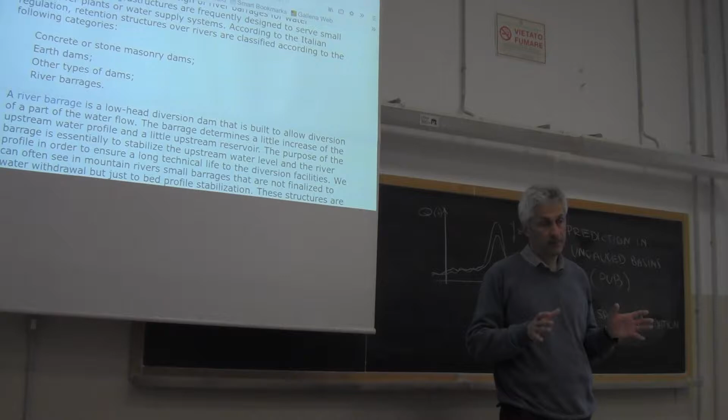Dams are conceived in order to store water when we don't need it and to release water after storing it when we need water. So the purpose of a dam is to create a large storage. The storage in river barrages is much smaller. River barrages can ensure some compensation, but not in the long term. If they can provide some compensation, it is normally limited to 24 hours when I talk about barrages.

In dams, the compensation is seasonal. Usually we accumulate water during the winter and release it during the summer. For barrages, the volume is much smaller. As a consequence, dams are more important infrastructures with respect to barrages. Barrages are smaller infrastructures. Typically, they are built over small rivers, not only, but typically over small rivers.

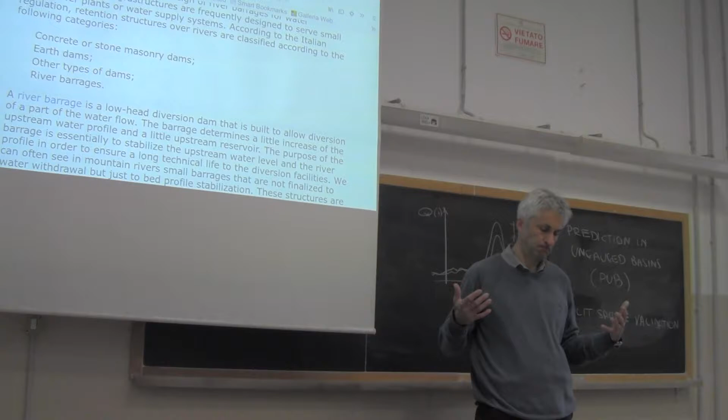Keep in mind that there are some exceptions on the purpose of barrages. Some of them may be built just for stabilizing the riverbed, not necessarily for withdrawing water. Some of them may be built for ensuring navigation, so keeping the water level at a measure that allows navigation. But the great majority of barrages are coupled with some withdrawal facilities.

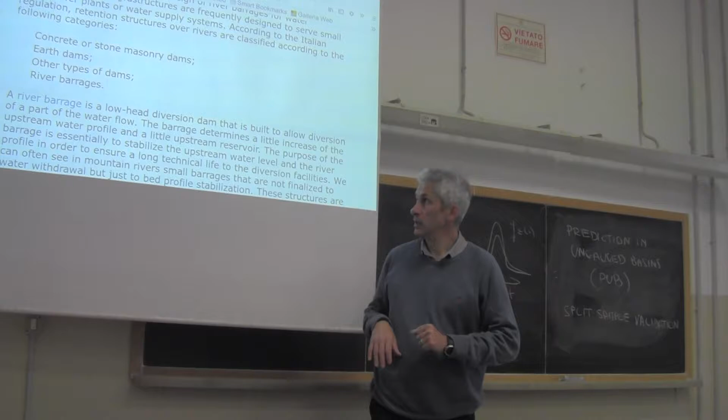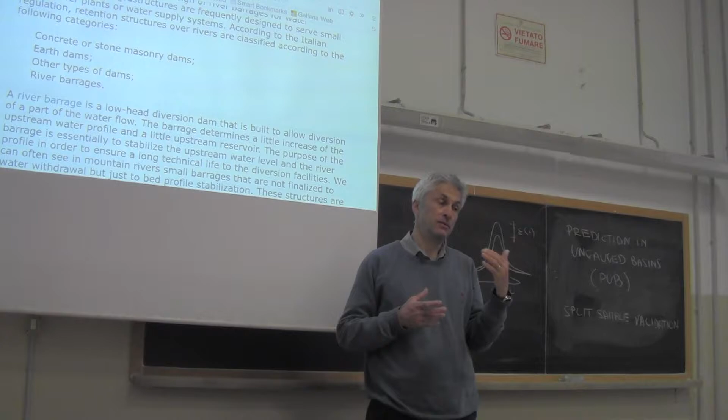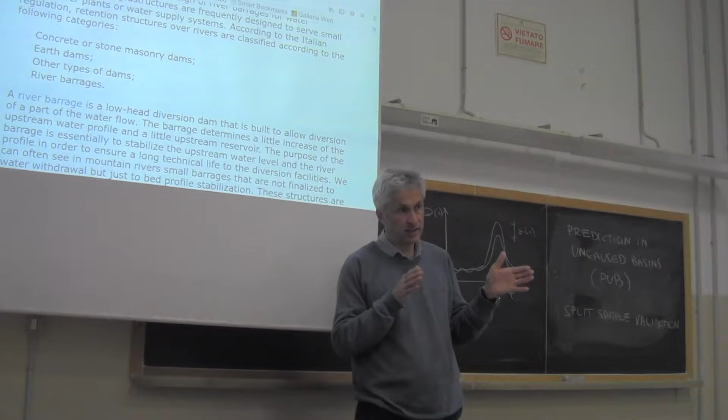Now, in order to establish by law the difference between the two, because it's extremely important for administration that we make an objective difference between barrages and dams, the Italian law in force adopts a criterion that is based on two indicators. And the first indicator is that, let me see if it's already here. No.

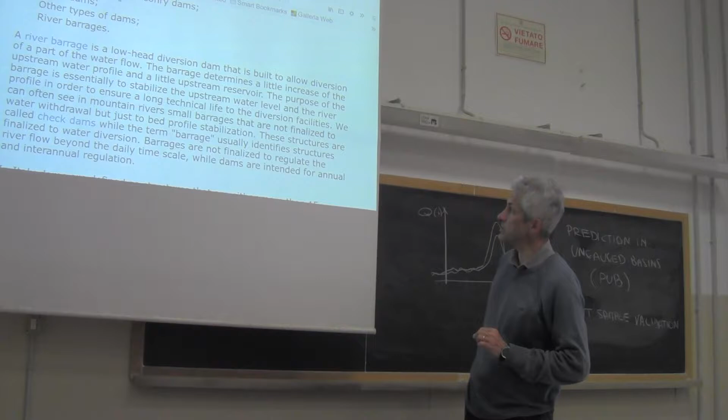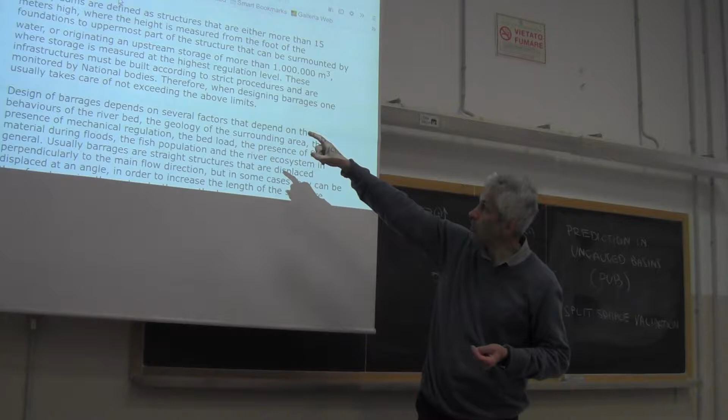In Italy, dams are defined as structures that are either more than 15 meters high, and the measure is taken to the top from the bottom of the foundations. So if a transversal structure exceeds 15 meters of height, it's a dam, or originating an upstream storage of more than 1 million cubic meters. So if one of these two conditions is met, then we are talking about a dam.

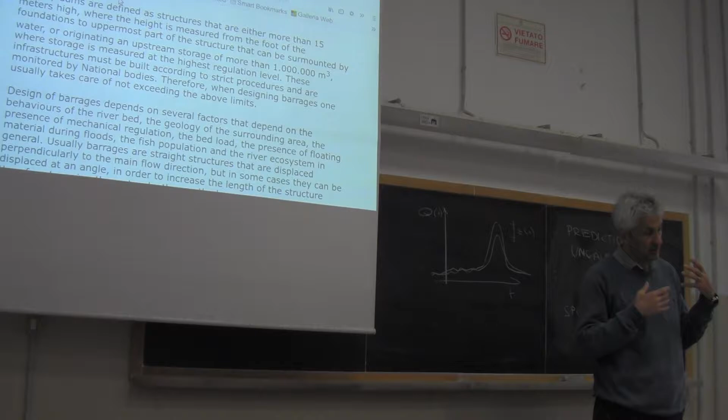And this means that the structure is under the remit of the National Authority for Dams. And the National Authority for Dams prescribes that continuous and very detailed monitoring is ensured for the structure itself. The reason is clear. If you have a structure that stores more than 1 million cubic meters of water or is taller than 15 meters, it's potentially dangerous. In case of a collapse, of course, you induce a potential danger downstream, and for this reason it needs to be monitored and surveilled with very specific regulations.

You can say that this classification is a bit strange, because if the storage is 999,999, then it's not considered to be dangerous. If it is 1 million, then it's dangerous. But still you need a threshold, you need a line of separation between structures that need to be carefully monitored and structures that need less monitoring.

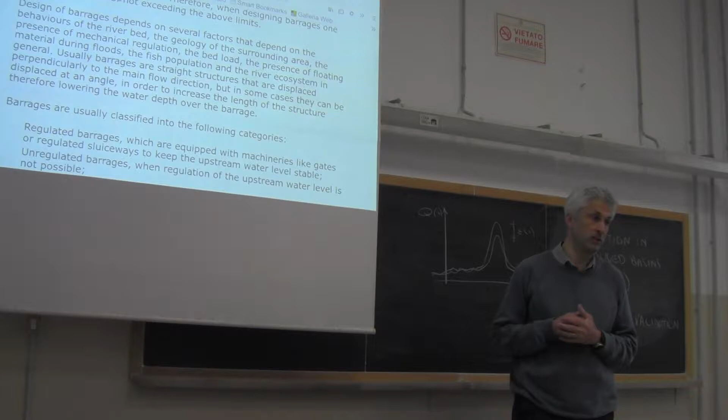So, we don't talk about dams here, we talk about barrages. What is the reason? The reason is very simple. First, dams are more complicated. They require a dedicated subject, a dedicated university course. But there is also a very practical reason.

Today, it's very, very rare, very infrequent that engineers get an opportunity to design a dam, because most of the dams that were considered to be efficient and economically convenient have already been built, especially if you work in the Western world. There are still dams under construction in the East and in Asia. They are building a lot of dams, and the reason is that in the past they couldn't have the opportunity, due to political tensions or an economic situation that didn't allow the investment of the large amount of money needed to build a dam.

Conversely, river barrages are built very frequently today, because today there is a lot of interest in renewable electricity. And the reason is clear, because we want to minimize carbon emissions. And in renewable electricity, one very interesting resource is given by small hydropower plants. And small hydropower plants can be built just by realizing a small river barrage. And this is why there are a lot of requests to professional engineers to design this type of barrage today.

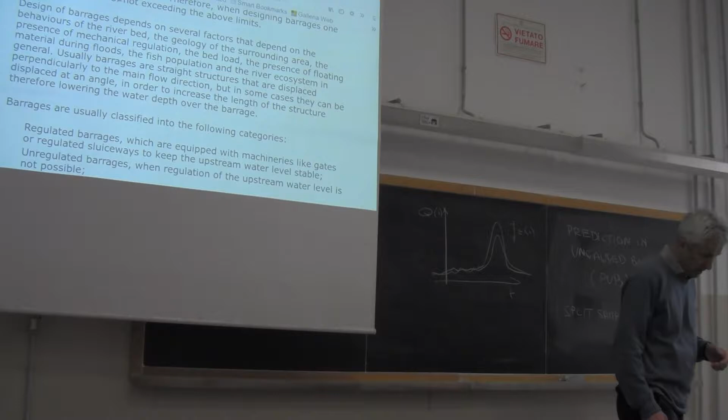Keep in mind that when we talk about barrages, I mentioned that some of them are built with the only purpose of stabilizing the riverbed. Usually in this case, we don't call them barrages, we call them check dams. If the only purpose is to fix, to stabilize the riverbed, then we talk about check dams. And we define barrages as the structures that are intended to withdraw the water.

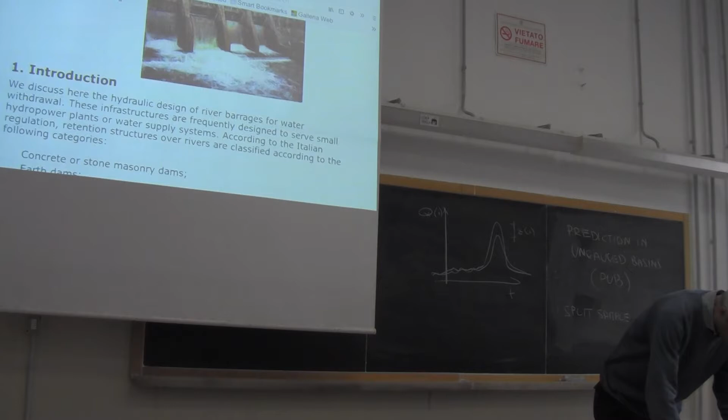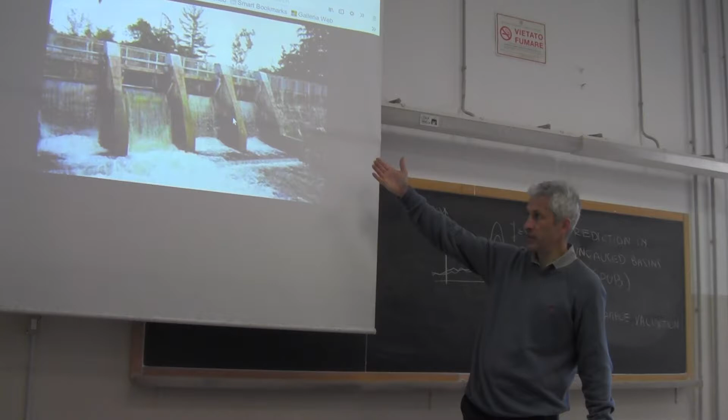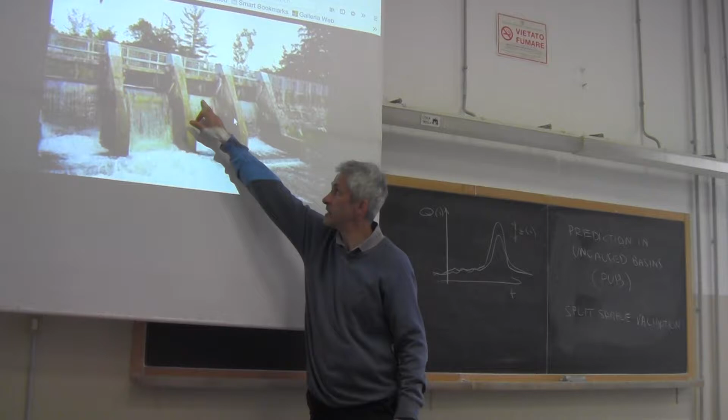I just want to give you an idea; here there is a picture. And this is a typical barrage. You see that there is a transversal structure that creates some storage upstream, and then you have water that can flow by surmounting a gate here. The gate is placed here, and this is what is called a weir. It's a threshold that, once it's exceeded by water, lets water flow downstream.

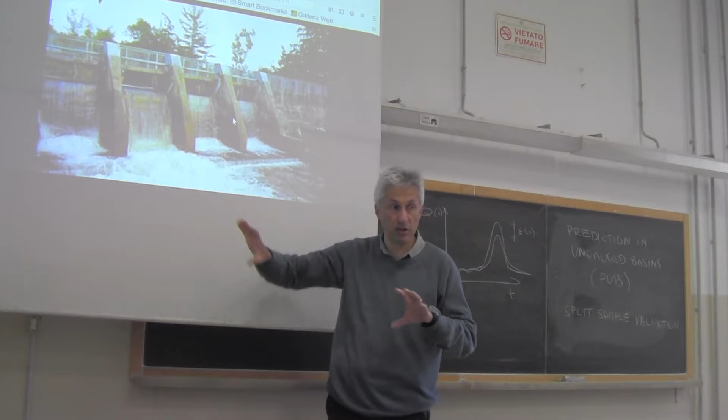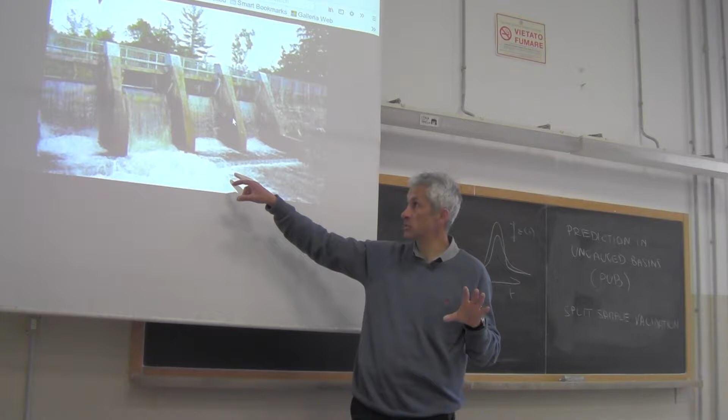And water can flow downstream also by flowing through a bottom discharge. These bottom discharges are called sluiceways. So the weirs are the apertures, let me call them, that are passed because the water level gets above a threshold. When you have a flow of water from the bottom, then it's called a sluiceway, and it can be regulated or not. In this case, it's not clear to me if it's regulated or not. If there is a gate that can move up and down, then it's regulated. If there are only windows with no gates in the bottom, they are called sluiceways.

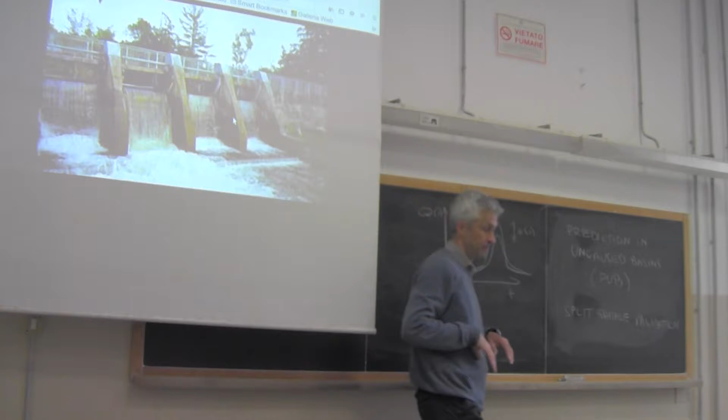And I can show you some other pictures. Let me check here. Briglia is the Italian word for a check dam. Just one second. Here is another example. This is a check dam, and you see that there is a wall with a passage of water here, and this is typically a check dam. The only purpose here is just to stabilize the level of the riverbed.

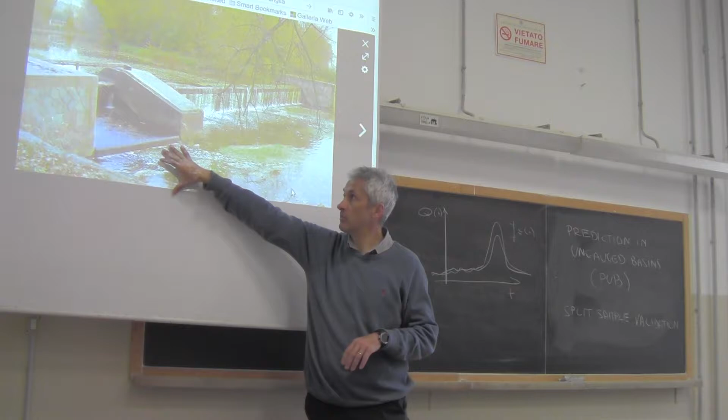The riverbed is stabilized because you have sedimentation upstream, and therefore the riverbed gets to the fixed level of the check dam here. And these passages are normally built in order to concentrate the low flow in a small portion of the river. The reason is that they want to make easier the migration of fishes upstream. If you concentrate the low flow in a small portion of the river, then the fishes can find a way to get upstream of the barrage.

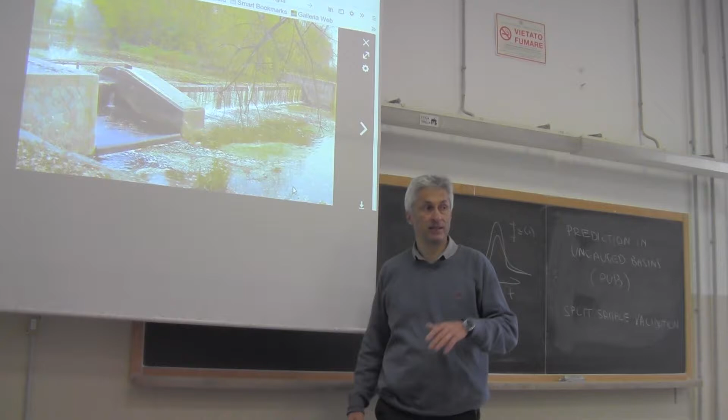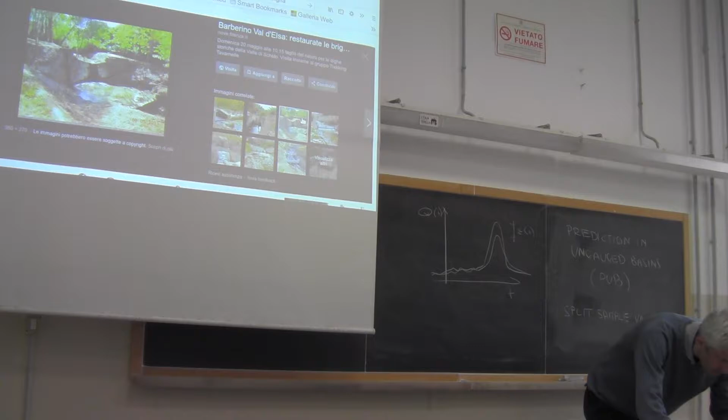Let me see. These are pictures of check dams again. This is another example on a small river. Not very visible, but this is an old check dam. And in this case, again, this is a check dam and not a barrage, but their structure is very similar. In this case, you have the crest of the check dam that is lowered in the middle.

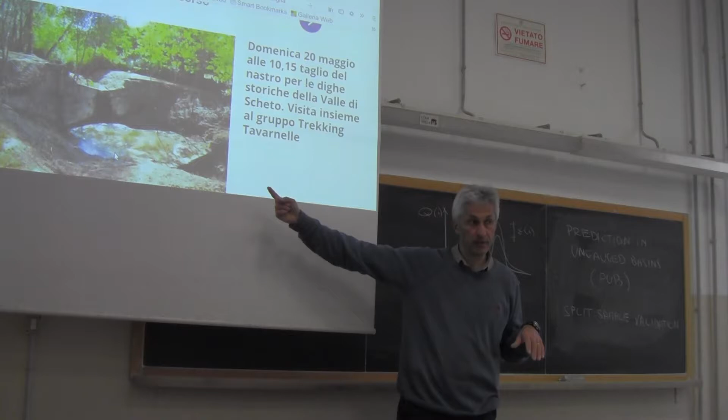And in this case, this is done not for the purpose of allowing migration of fishes. It's done because they wanted to keep the water flow far from the sides of the river, from the hill slopes, in order to avoid erosion at the toe of the hill slope, because you know that erosion at the toe of a hill slope can originate landslides. And therefore you will see that even river barrages sometimes adopt this solution. They have a concentration of the flow in the middle of the river, which is coupled with a fish ramp in order to allow fishes to migrate upstream.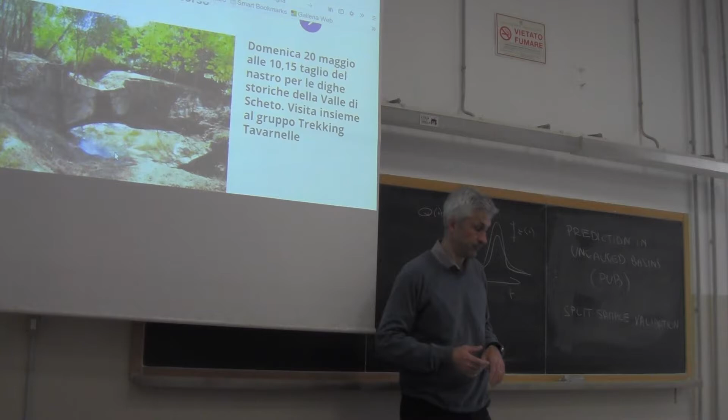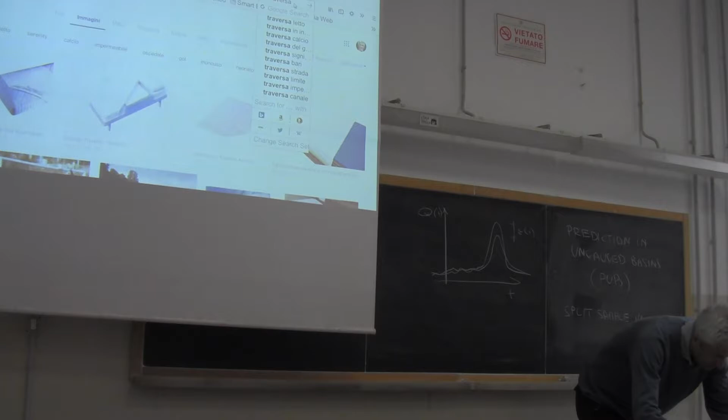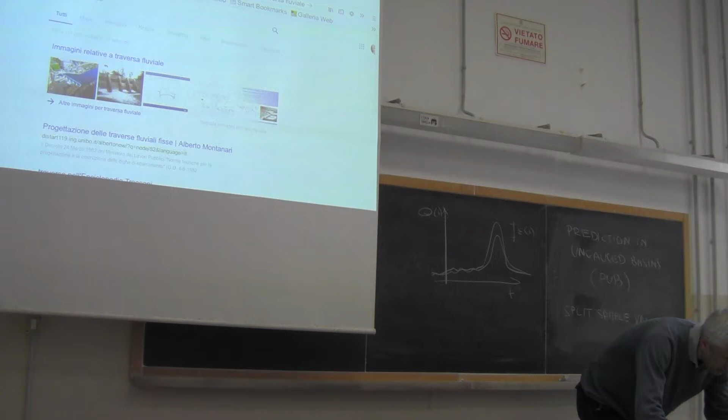Okay, and instead, if I look for the Italian term traversa fluviale maybe, because otherwise it's too... Okay, we get this one, which we already saw, but this one is interesting.

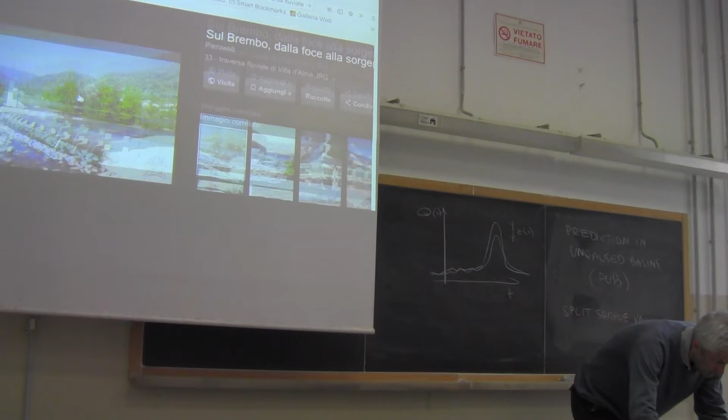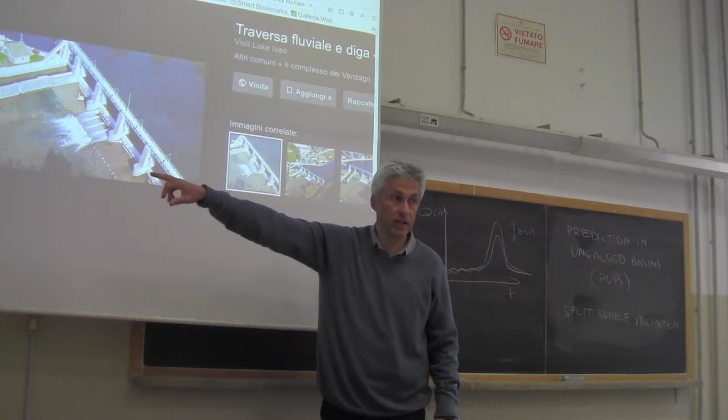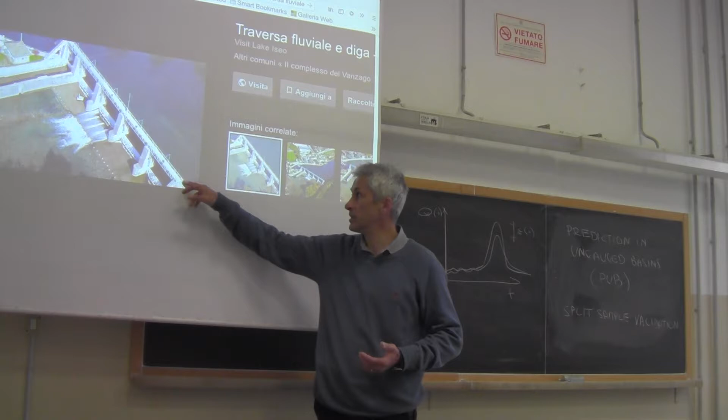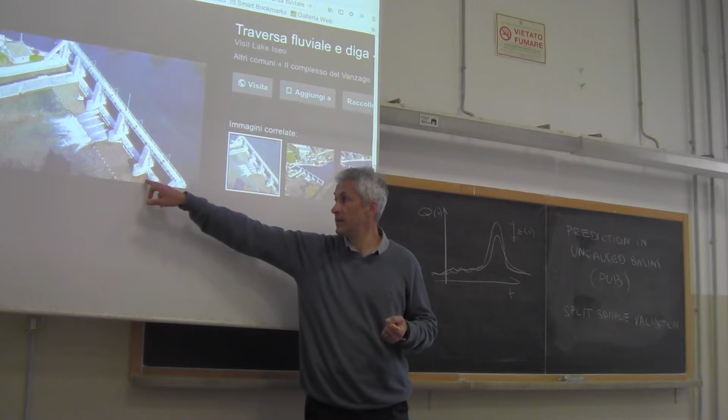Okay, this one is an interesting example, and you see this is a barrage with windows, gates in the middle, and the fish ramp on the left. You see this long channel on the left is a fish ramp, and here it's equipped with gates, mobile gates, which are maneuvered by devices that are placed over this top beam, and by pulling the gates from the top beam, they regulate the outflow from this barrage. I wanted to give you.

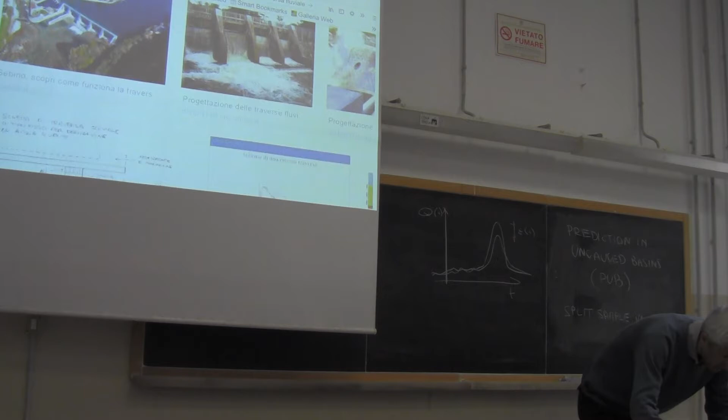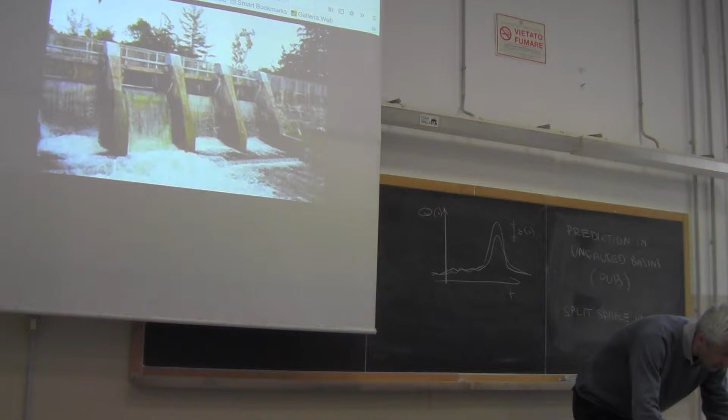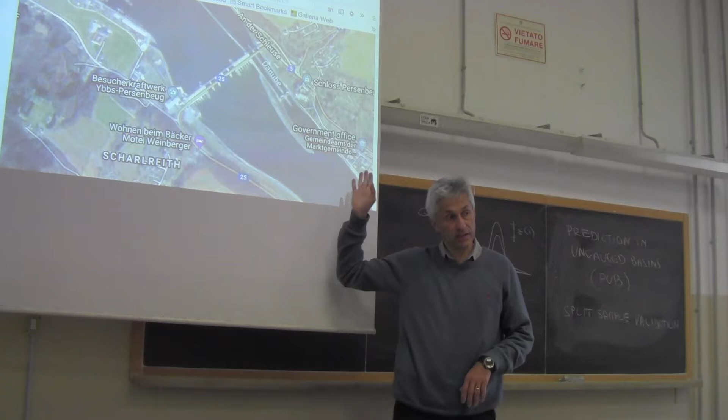Okay, let's concentrate on the figure on my webpage, which I think is informative enough. On my webpage you can find this image from Google Earth, which can be magnified. You can zoom it. And this is a barrage that is built on the Danube River. The main purpose of this barrage is to ensure navigation, but it is also used for

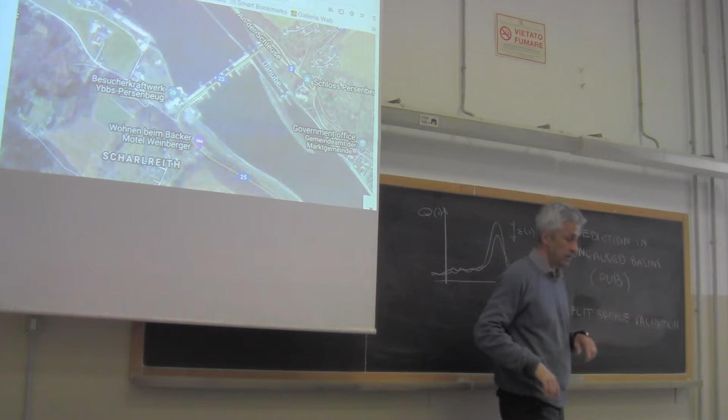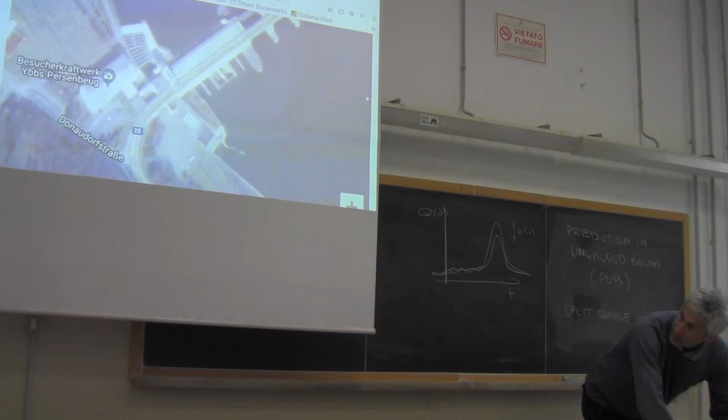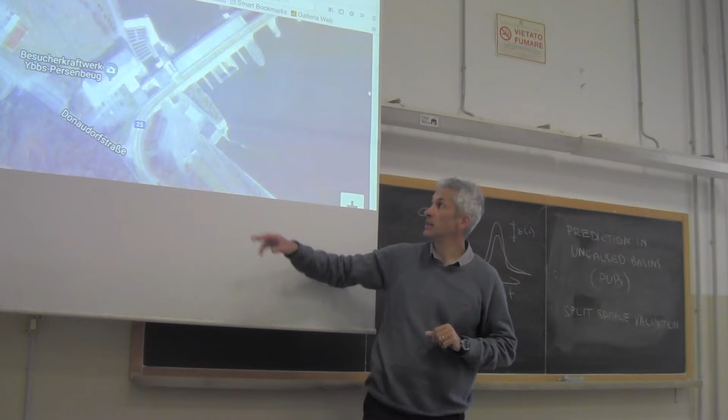producing hydropower. And if we enlarge it, we can clearly recognize some key features. For instance, here, this is the hydropower plant. And these are the gates through which water flows to produce hydropower. It's very simple. Basically, there are turbines that are moved by the flowing water. And this is a symmetric structure, so even on the other side there is a hydropower plant.

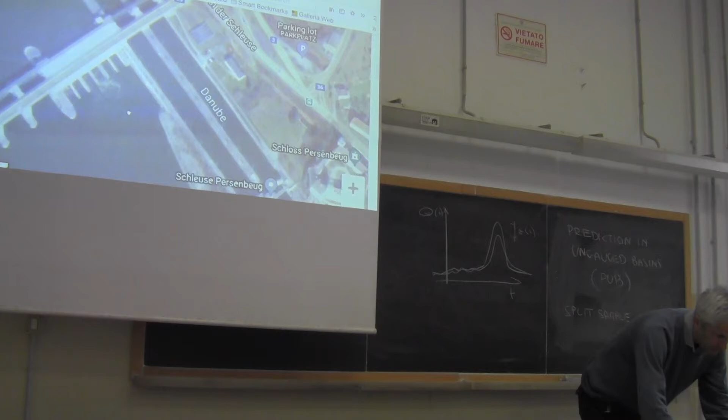And the reason why they use two plants is that on the two sides of the Danube here there are two different states. I don't remember what they are, it is written in the web page, and therefore they wanted for each state its own hydropower plant. This one that you see here is the navigation lock. So this channel is the navigation lock. The navigation lock allows ships to move upstream and downstream.

And the way they allow the ship to move upstream and downstream is through an alternating opening of gates that are placed upstream and downstream. I will show you a sketch later on. And you see the gates downstream are gates called Porte Vinciane. They are gates that close in this way, and in this way they can use the pressure of water to keep the gate closed.

This is an example of a very complicated infrastructure. We will not focus on this complicated infrastructure. We will focus on barrages with no regulation, so barrages that are not equipped with automatic regulation gates. Those are the barrages that are typically realized on large rivers. We will focus on small barrages for small rivers, which are more frequent and more frequently built.

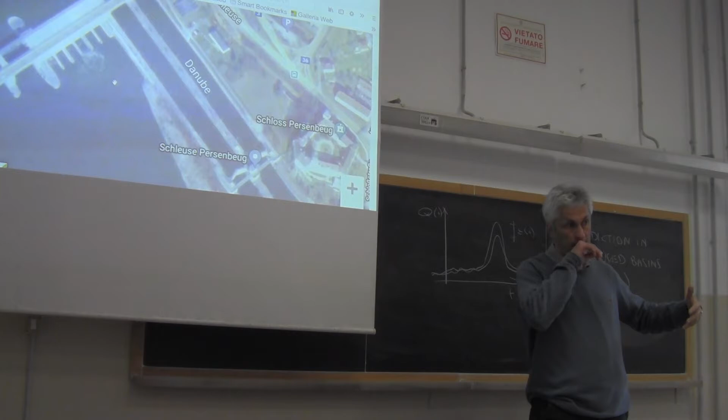Keep in mind that these barrages on large rivers, which again are built essentially for allowing navigation, have a strong impact on the ecology of the river itself. The reason is that you basically make the flow of water slower, and therefore the exchange of water in the river becomes slower, and therefore there is an impact on the ecosystem.

And this is why, for instance, on the Po River, they decided not to build any barrage beyond Isola Serafini. The Po River is equipped with only one barrage, whose main purpose is to produce hydropower, which is the centrale of Isola Serafini. And in the Po River, we try to avoid building barrages in order to preserve the quality of the ecosystem.

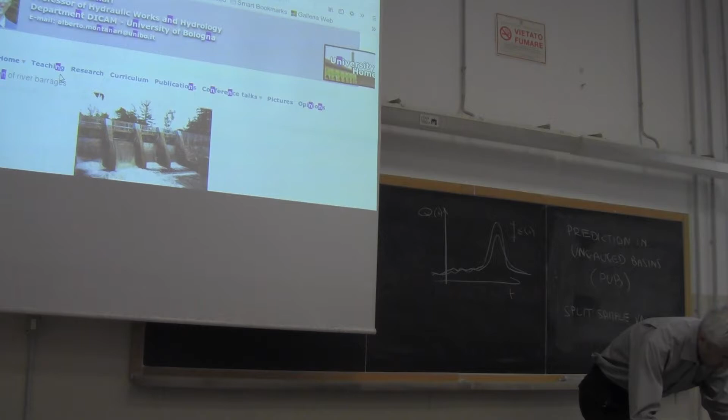Okay, let me see if I have a link here that explains how navigation locks work. No, it's not here. Okay. Anyway, let's forget about navigation locks because it's out of our purpose.

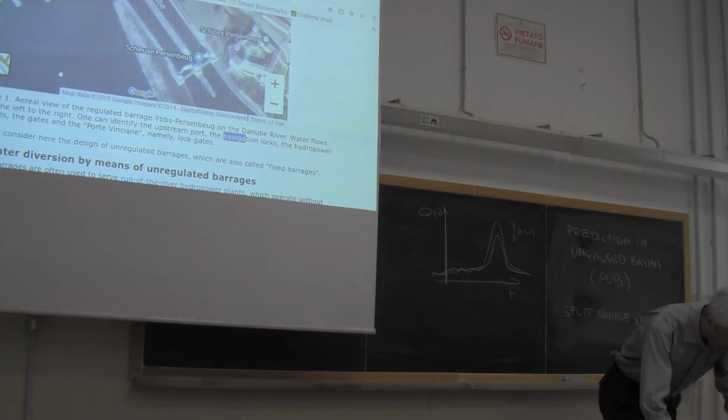Okay, so let's focus on river barrages and water diversion by means of unregulated infrastructures. With the term unregulated, we mean that there is no automatic regulation of the upstream water level. There is some regulation in these barrages which are called unregulated. There are still some gates that can be opened and closed, but the main purpose for putting gates there is to interrupt the water diversion under certain conditions, not to regulate the storage and water level upstream.

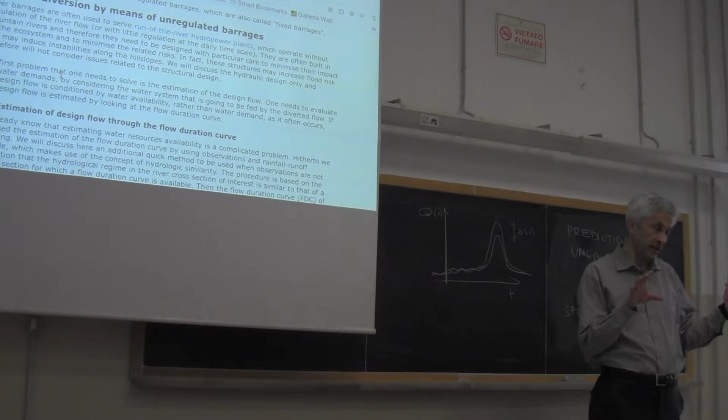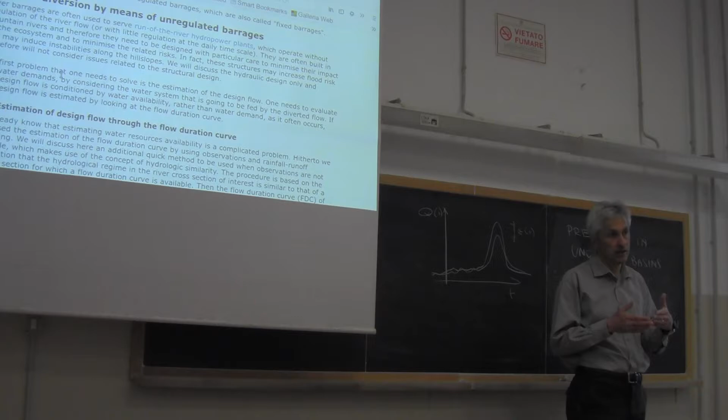Okay, now, these barrages are, as I mentioned before, typically realized for producing hydropower, and in particular, they are widely used for run-of-the-river hydropower plants. Run-of-the-river means that we get water from the river when water is available without any storage. In Italian they are called impianti ad acqua fluente, which means literally plants for flowing water, not for stored water. But in English, they are called run-of-the-river hydropower plants.

Now, the first problem that we need to solve when we design a barrage for water diversion is to estimate the design flow, whatever the purpose is. I'm frequently mentioning hydropower plants, but there are barrages that are also realized just for withdrawing water and delivering it to water supply systems, irrigation or civil use. Whatever the purpose is, our first problem is the estimation of the design flow.

But we know how to solve it, because we already dealt with direct and indirect, inductive and deductive methods for assessment of water resources. We know that when we can use a flow duration curve, we use the flow duration curve, and we know that we can use models if we don't have observations or if we have only a limited amount of observations.

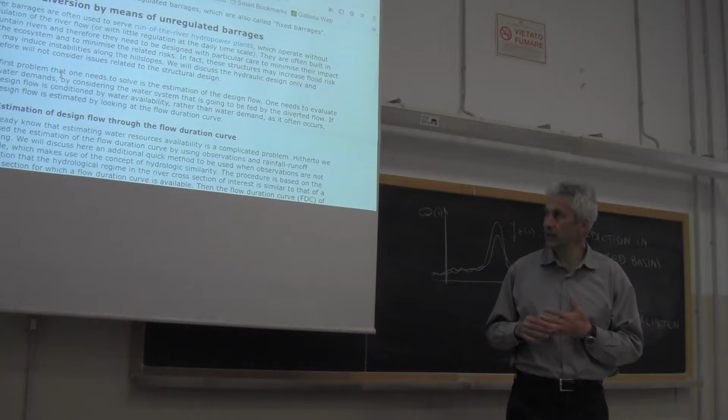So this is a problem that we already solved, and therefore here you have a couple of sections that are dedicated to the flow duration curve. And also here you see a mention of the water withdrawal index and the water use index. We already discussed them. Okay, so we don't need to specifically focus on these problems.

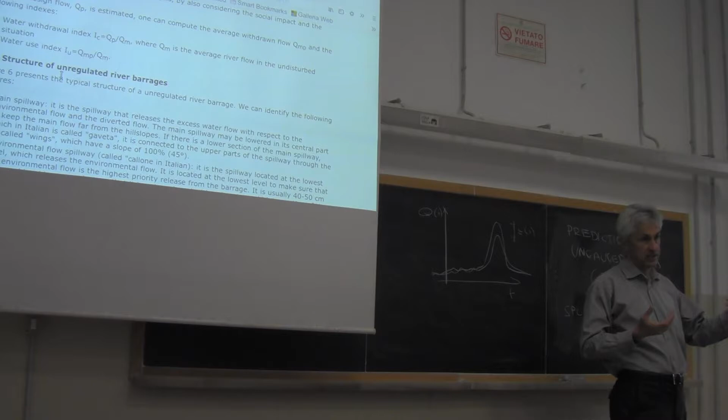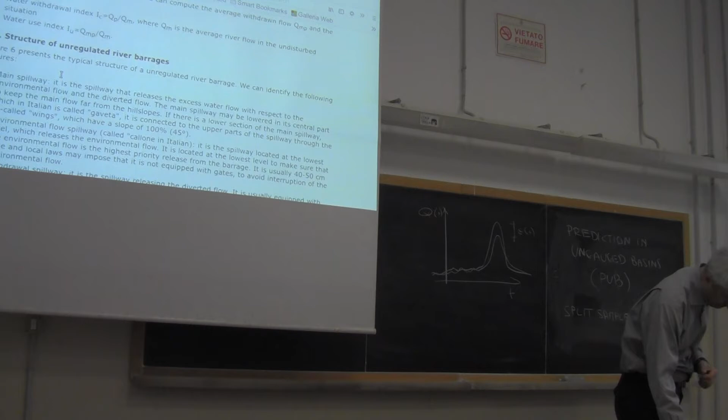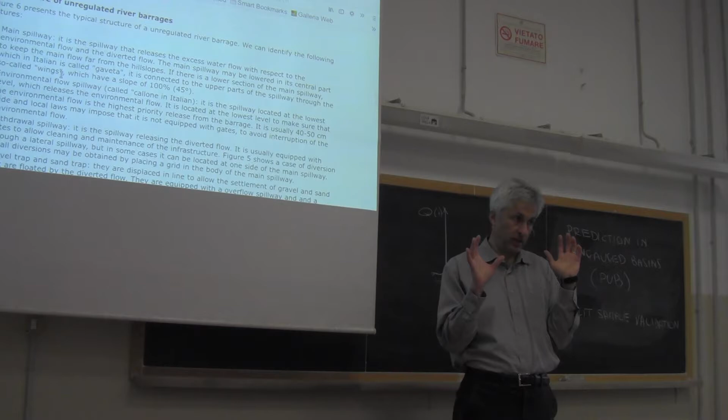What we need is to focus on the other design problems related to the sizing of the barrage structure. And we will not focus on the structural design of the infrastructure, but we will focus on what we call the hydraulic behaviors, and therefore what is the elevation of the structure and what is the level and the functioning of the various weirs that we need to realize in order to withdraw water and in order to allow the excess water to flow downstream.

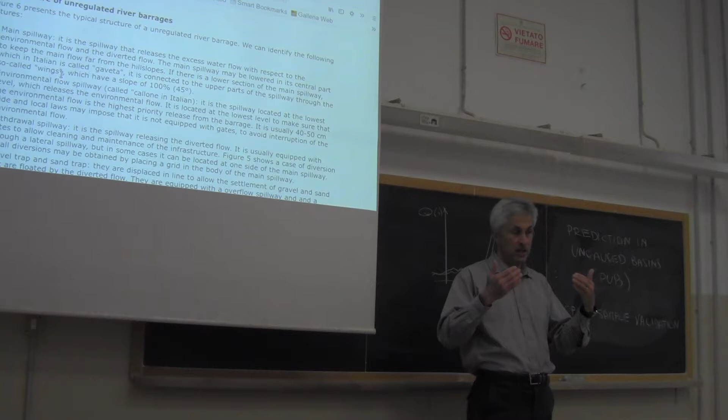Remember that these structures are designed, as I said, to withdraw water for whatever purpose. But we have to limit their impact on the river. And therefore, we have to make sure that we have facilities for withdrawing water and facilities that allow excess water to flow downstream with a limited impact.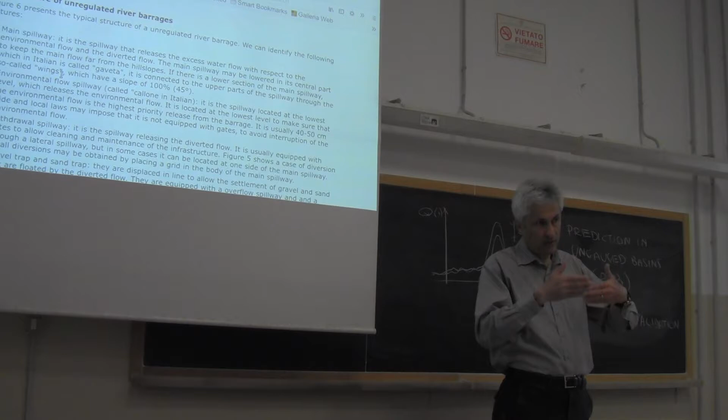So we will have a design flow, which is the amount of water that we need to withdraw, and then we will have an excess flow, which will not always be there, typically during high flow conditions, the flow that exceeds the amount of water that we need to withdraw. So we will talk about withdrawal flow and excess water.

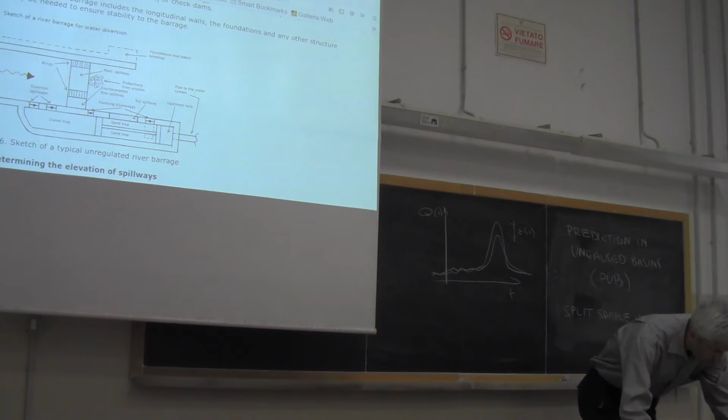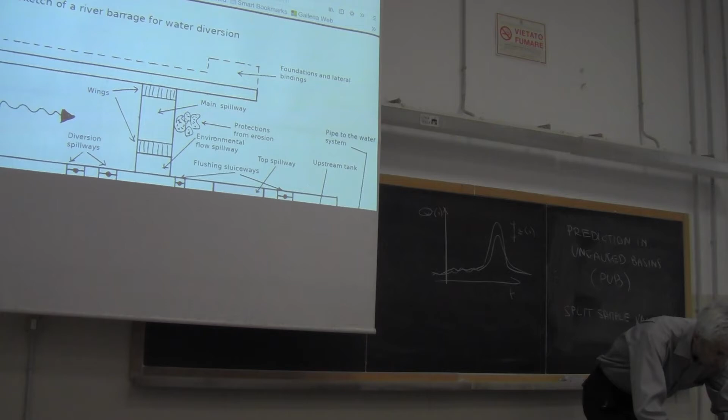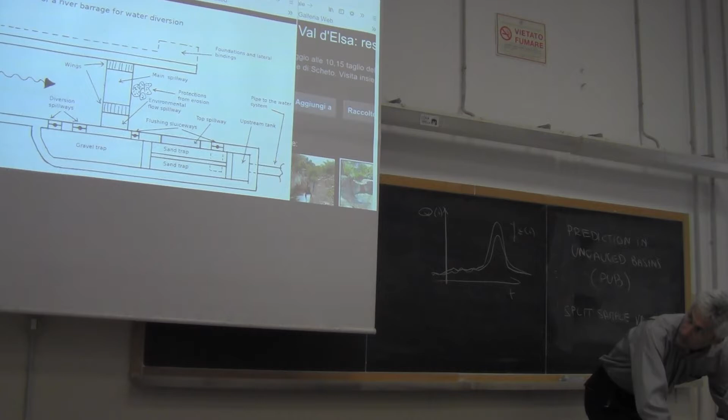Let me open this picture and enlarge it because it clarifies what is the typical structure of a river barrage. Let me see if I can. I need to resize it. Not very clear, but let me check if I can do it another way. No, this way. Just 1 second. Okay, I think this is fine.

Okay, so we have the river flowing from the left to the right, and the typical structure is given by a transversal wall, and in this case the wall is placed perpendicularly to the main direction of flow. But in some cases you may see structures placed at an angle, and the reason may be that you want to make the wall longer, in order to have more space available, because sometimes we need to put facilities in the body of this transversal structure. In this case, for simplicity, it is placed perpendicularly.

And we have what is called a main spillway, which is the spillway or weir over which the excess water flows, and this main spillway should be designed in order to allow the flood flows to pass through without causing a significant increase of the water level upstream. How to do this, we will see later, okay?

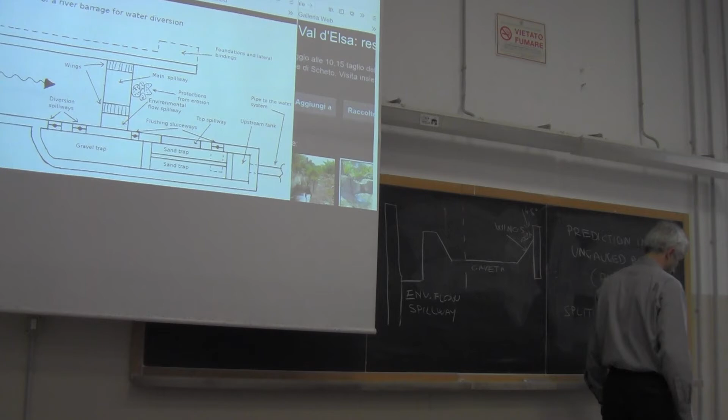What is this second weir? This is the environmental flow weir or spillway. It is placed at a lower level. What is the reason why this weir, which is the weir that is in charge of allowing the environmental flow to flow downstream, is placed at a lower level?

Because we want to give priority to this flow. We want to make sure that the environmental flow always flows downstream. Keep in mind that the environmental flow must be always ensured. And therefore, it has to be placed at a lower level with respect to the excess flow spillway.

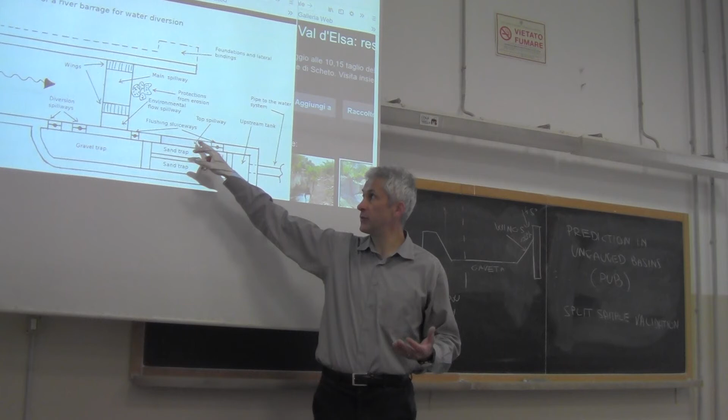Typically, we have here downstream the environmental flow spillway. We may have a fish ramp, which is not depicted here. I didn't put the fish ramp here because it would make the sketch too complicated. But typically we have here a fish ramp.

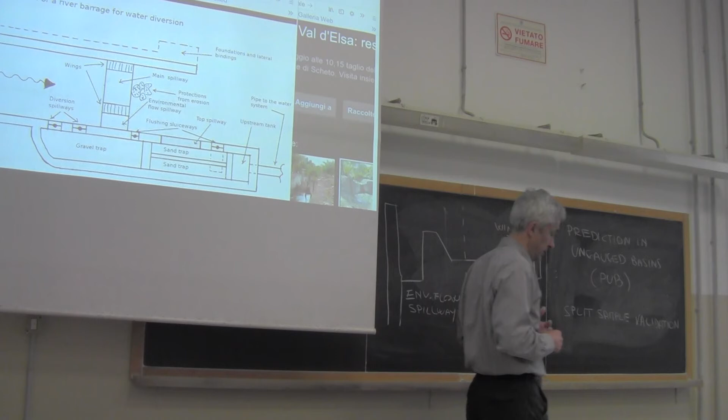Now, what's missing on the blackboard is the set of the diversion facilities. In this sketch, diversion is operated laterally, lateral diversion, which means that there are diversion spillways that are placed on the side of the structure, and they must be placed at a proper elevation. Proper elevation because our purpose is that this plant works automatically without any regulation.

As I said, and we will see, there are some gates that are put there, but only with the purpose of occasional maneuvering, for interrupting the flow, for cleaning, for maintenance, etc. It's not a continuous maneuvering of these gates.

So if I want that this structure works without any regulation, because it's an unregulated barrage, it's clear that I have to make sure that the various spillways are placed at an altitude that allows an automatic operation. They need to be placed at an elevation in order to make sure that everything works by gravity. Therefore, I already mentioned that the environmental flow spillway has the lowest elevation.

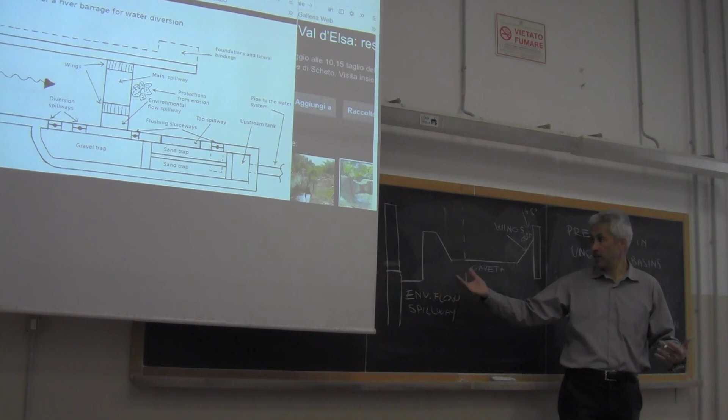And therefore, if I have an increase of flow from upstream, the water level will increase because the environmental flow spillway is quite small. The water level increases and reaches the level of the diversion spillway. And therefore, I start seeing some water that flows through the diversion spillway and goes to distribution through a series of facilities that we will carefully discuss.

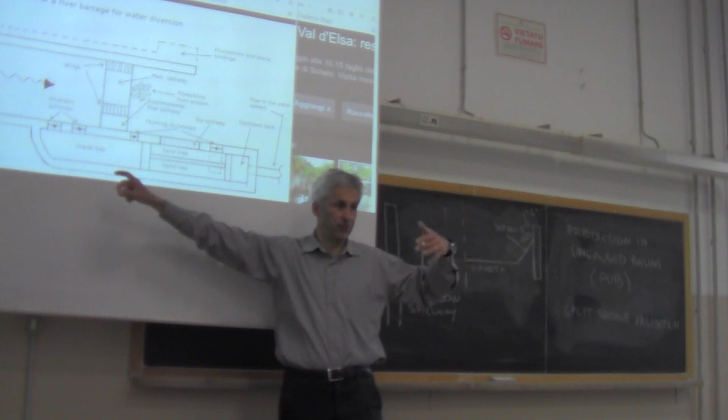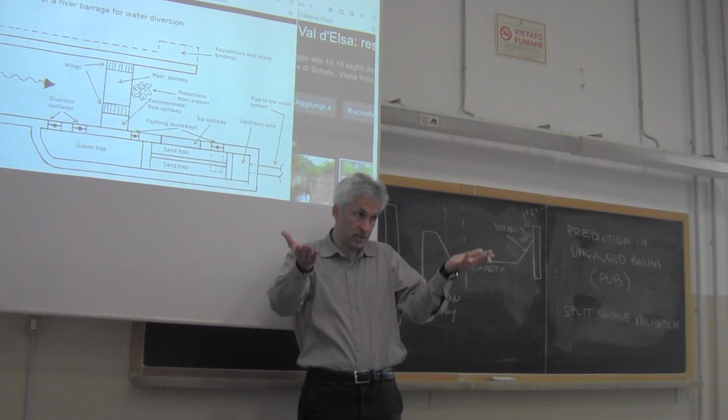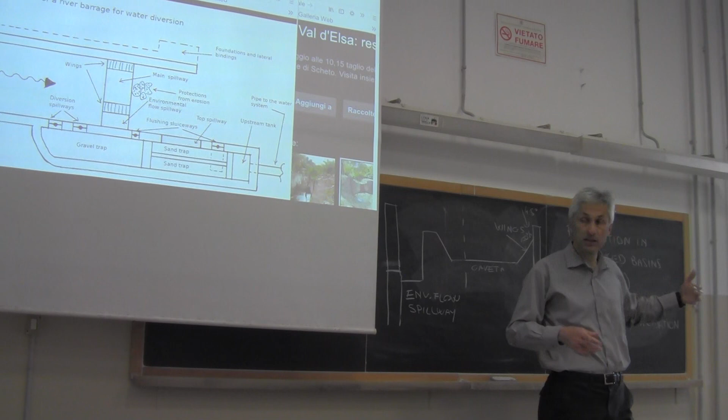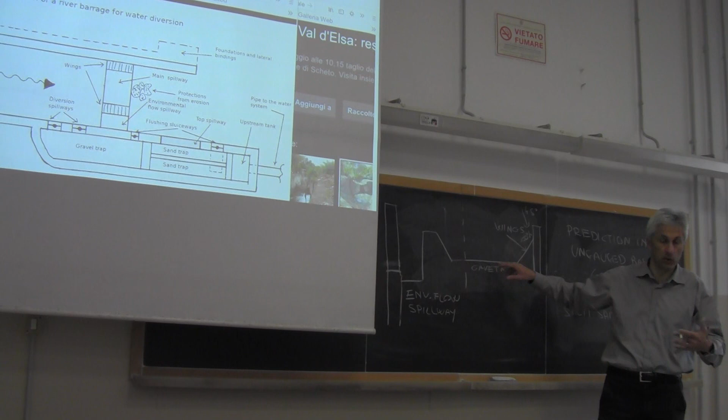Then, if I have enough water from upstream, let's suppose during a high flow period, I still will observe an increase of level upstream because these spillways, environmental flow and diversion spillway, are not very large, so water will accumulate upstream and may reach the level of the main spillway, especially during floods. And therefore I will start seeing some water from the main spillway, which is very large because I need to make sure that the flood flows can flow downstream without any problem.

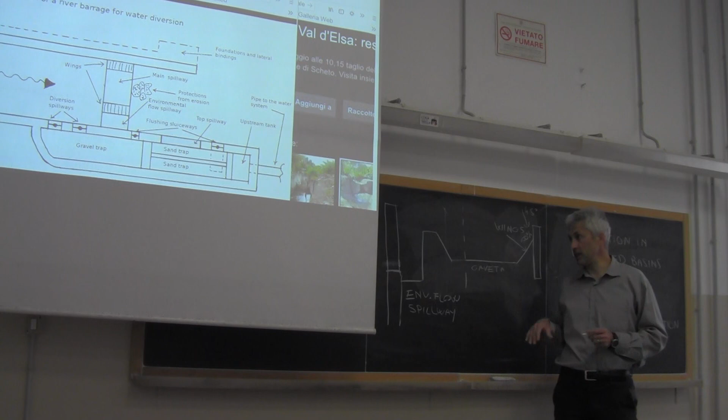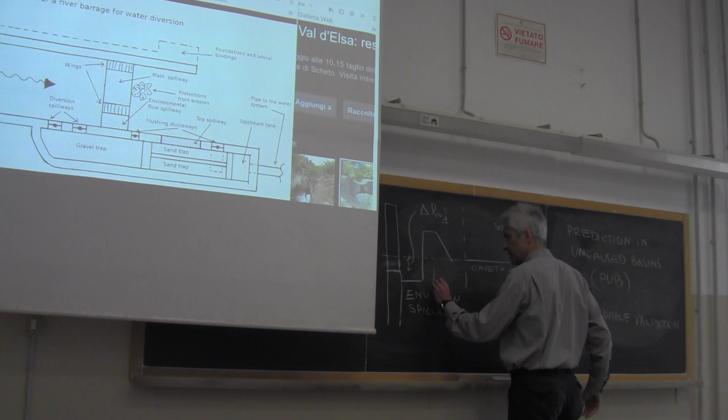So I hope the sequence of the levels is clear to you. First, environmental flow spillway. Second, diversion spillway. Third, the main spillway. And now we can indicate with delta H1 the difference in elevation between main spillway and diversion spillway, and I can indicate with delta H2